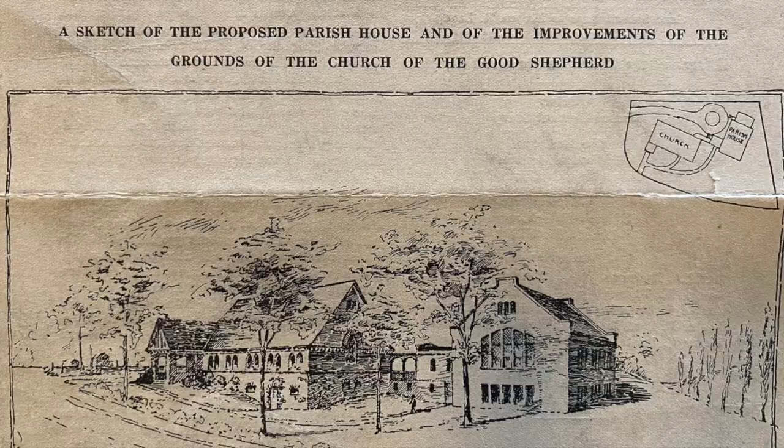A polio outbreak and injured soldiers returning from the Great War were the first to reveal that this would be a problem Good Shepherd would need to rectify. In 1916, the parish adopted plans to build a parish house that, among other benefits, would solve the problem of handicapped accessibility. They proposed a 5-phase project ultimately to offer relief to those who had trouble accessing the church. Because of the First World War and the economic collapse of 1929, most were not implemented.

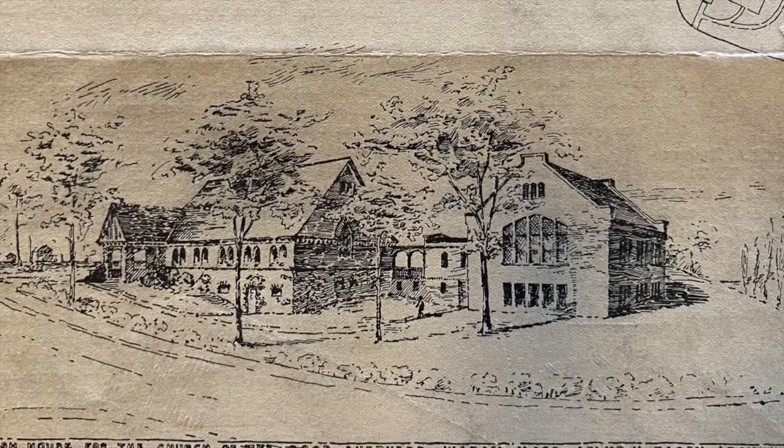After the Second World War, optimism, prosperity, and renewed faith led to the construction of our current parish house, which now houses church offices and Sunday school rooms. At the time it was built, they ensured all of the first floor was accessible, but not the second floor or the historic church. For years, we have considered plans and proposals, but none has been successful. With unanimous support of the vestry, we offer a solution to this century-old problem, called Angels Ascending and Descending.

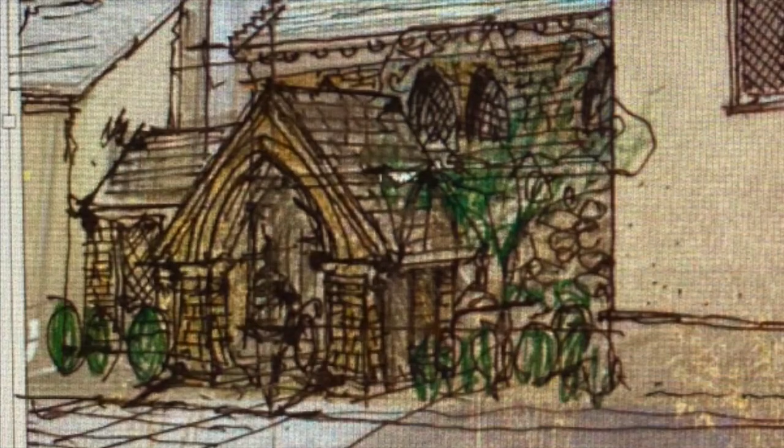In the book of Genesis, Jacob finds himself in a strange and difficult place. On the run from his brother and at odds with those around him, Jacob wrestles with God, receives God's blessing, and changes his name from Jacob to Israel, which means one who wrestled with God.

One night, while he sleeps, he has a dream in which he sees angels ascending and descending from heaven, and it is in that dream he realizes that God is with him and that he belongs to God. He names the place Bethel, meaning house of God, and he concludes that episode in his journey of faith by declaring, 'Surely the presence of the Lord is in this place.'

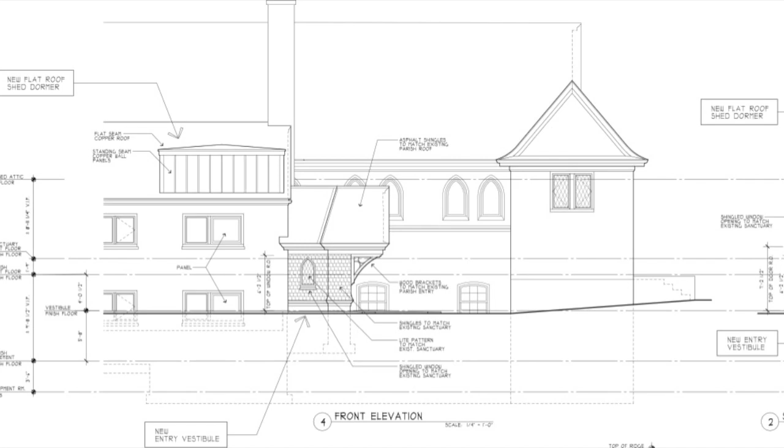Angels Ascending and Descending offers us a similar opportunity. It brings those separated from the full offerings of our parish into our midst, allowing everyone access to 100% of the parish, and it strengthens our own journey of faith, reaffirming our commitment to welcome and care for all in need of divine embrace and assurance.

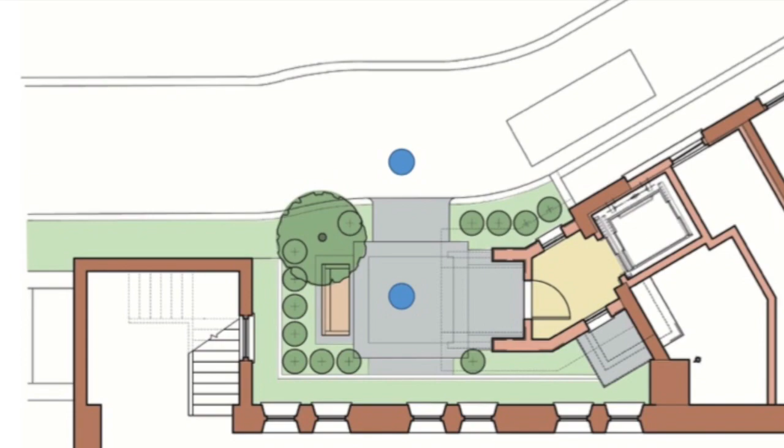Here you can see a plan showing the entrance level from the outside on the left-hand side of the church. You see a vehicle delivering a person in a wheelchair that then proceeds to the new courtyard between the existing church and the parish wing.

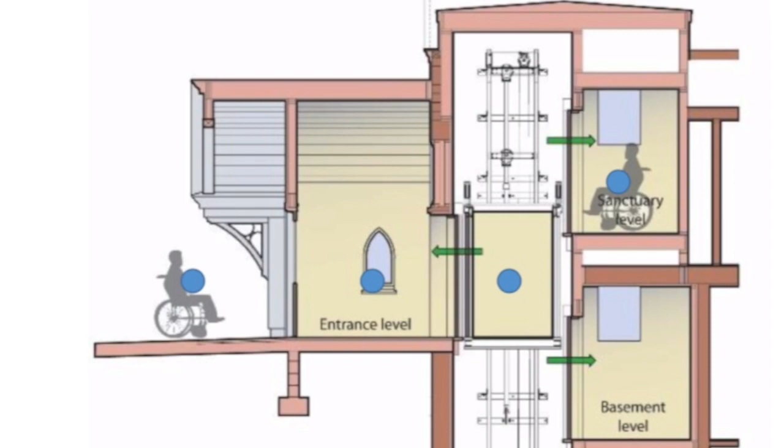From there, one pushes a button for an automatic door to enter a heated vestibule. Once the elevator is summoned, one enters, and from there they can go up to the sanctuary level, exiting into a new lobby with natural light and a skylight overhead. From there they can proceed to the sanctuary.

To connect to the parish wing, we're installing a motorized inclined platform which flips up against the wall and then flips down with a safety bar and full ADA commercial compliance, to take you up, on a sort of like a ski lift, from one level to another.

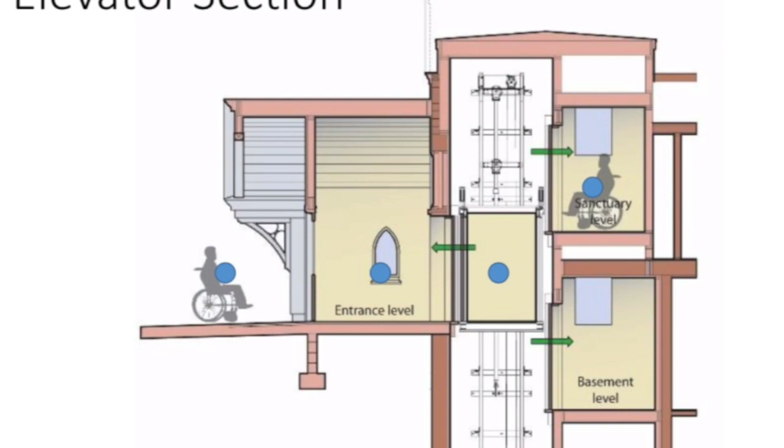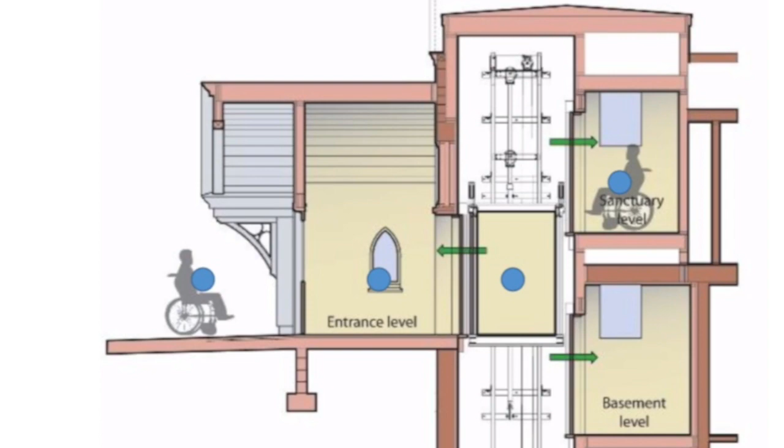What we see in this section drawing is the vertical relationship of these pieces. You see someone entering again from the courtyard after being dropped off through the Gothic canopy into the heated vestibule. Entering the elevator, they go up to the sanctuary level, or they can push the button and go down to the common room level.

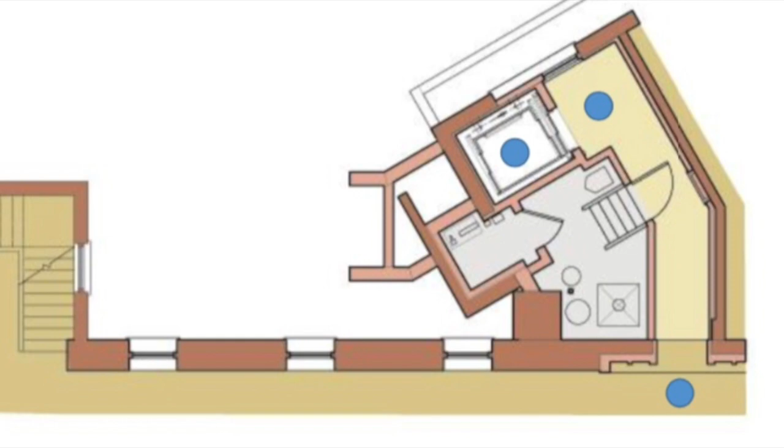The challenge is how to turn this area into a welcoming, beautiful church architecture for those arriving in a wheelchair or a walker.

So what we've done: we have our 100-year-old shingle-style beautiful church to my left, and behind it the 1951 sort of arts and crafts stucco. In order to have the architecture be more ecclesiastical, the new wing that we're building here is going to match the original church.

What we're doing is we have to build a heated vestibule to come out of the elevator door. There'll be a motorized door here to open, and then we're going to turn parallel, after coming out parallel to the parish hall behind me, we then have a portico, which is going to be on brackets to cover you as people come in.

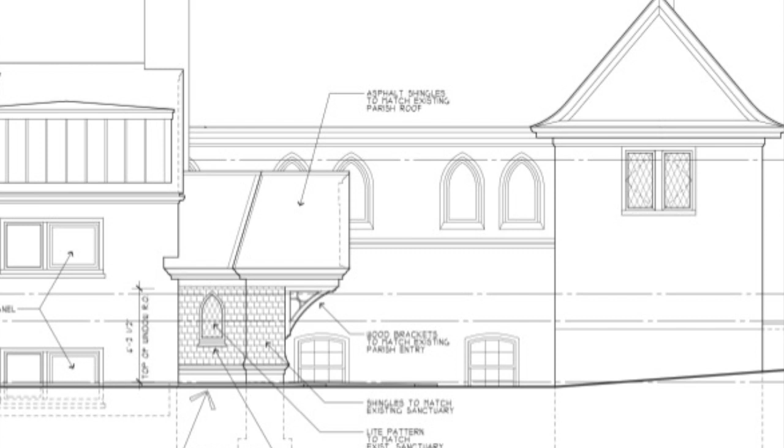We're going to design a wonderful stone terrace here so people can arrive by car, travel up a curb ramp to this place, enter parallel to the church, press the door, go inside the vestibule, and then enter the elevator. One of the fascinating things we've done is to match the style of the original church with its brown shingles and beautiful Gothic arch, and we're going to precisely replicate those.

So that you may think this vestibule was built back in 1895 or 96. In addition, we're going to have in this nice shady courtyard some boxwood surrounding it, a decorative tree, so it can also become a place for someone to take a midday break during the work week or after services gather to come in. And so we have our beautiful entry out on Beacon Street, and the goal is to have a smaller version of that beautiful Gothic arch as well.

With my background in historic preservation, I noticed these beautiful Gothic arches were incorporated in the 1951 parish wing. We are going to replicate this identical bracket, so there'll be two of these holding up the new Gothic portico, exactly replicating the church architecture. It's a blend of the old 19th century church and the mid-20th century parish hall.

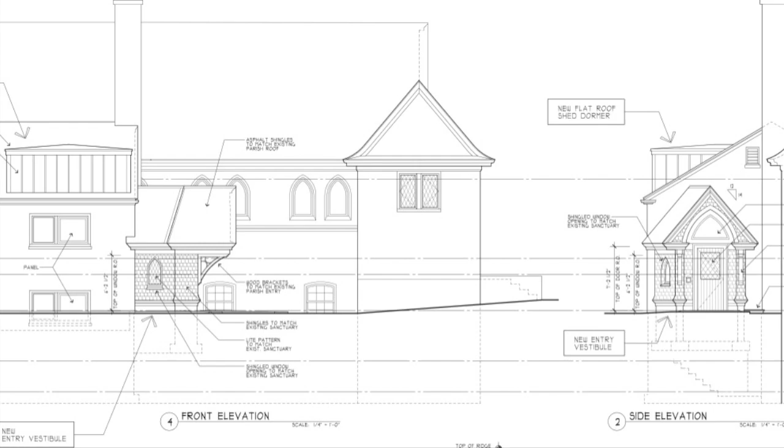This is a noble endeavor that with your help can succeed. Because of the novel coronavirus, we have an opportunity to accomplish this while so many things around us are closed. We also have the hope that when we return to church, all of us might be able to return. We may look back on this pandemic as a time when we righted this wrong together, with God's help.